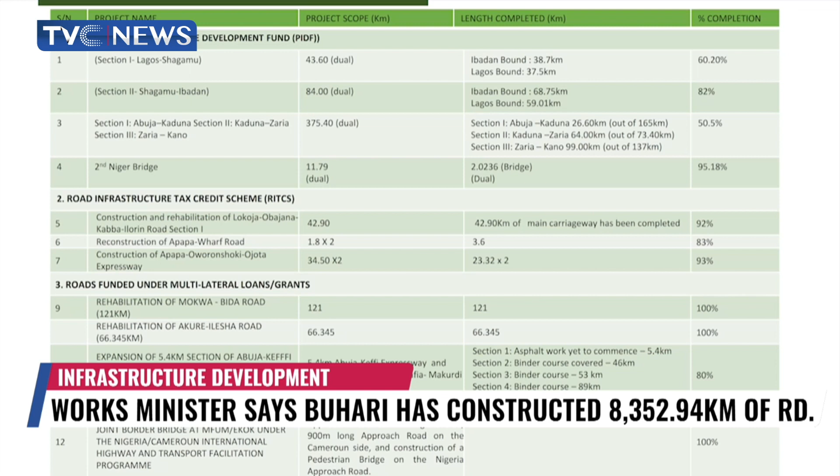And yes, everybody wants to see the final output, a finished road, a finished house, but we must understand that governments all over the world, without exception, commit to infrastructure for one major reason, in order to boost their economy. So beyond the roads, beyond the housing, there are a lot of human stories. And those were the things that I shared at the presentation. Those are the many unseen, perhaps unreported things that we have documented.

So when you're talking of infrastructure, it is for the purpose of boosting the economy, ease of doing business, travel time, quality of life. If a 3-hour journey becomes 30 minutes, you have extra hours of productive time that you can go and do other things. It becomes less stressful. It impacts cost of travel. It impacts cost of goods and services, and so on and so forth. So infrastructure is a means to an end, not an end in itself.

You were quoted as saying the administration has been able to construct and complete more than 8,352 kilometers of roads and created about 339,955 jobs between 2016 and 2022. Can you give us a kind of breakdown? Yes, I said so, and as I said, it is based on the report that we collated. So let me again explain, as I've sought to do on many occasions.

Nigeria has roads owned by different levels of government. So the total national network is over 200,000 kilometers. The federal government owns about 18% of that. That's about 30,000 plus kilometers. But they are the most used in terms of traffic volumes because they are roads that connect states, as against municipal roads that connect local governments and local government roads that connect wards. So we must understand it.

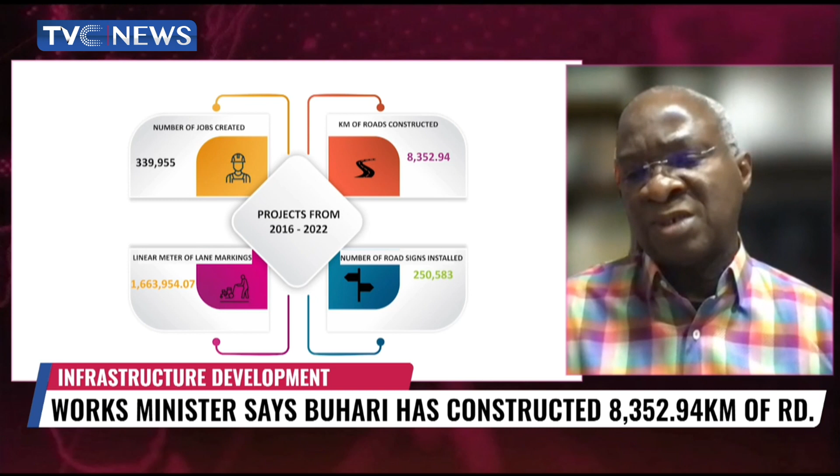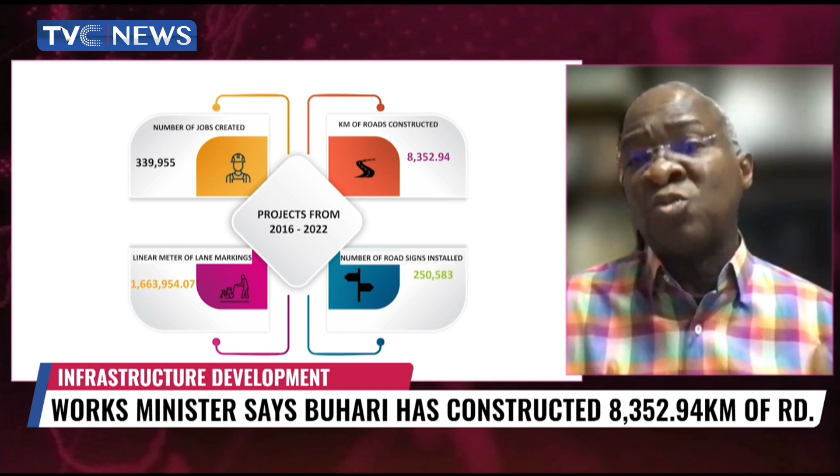So, for example, the Lagos-Ibadan Expressway that your colleague was talking about is 127 kilometers. So you don't rebuild 127 kilometers of an existing road by shutting it down. You can't. People's livelihoods depend on that road. So how do we construct? We close off a section of one side, perhaps 5, 10, 15 kilometers. We build that side, divert traffic to the other side. When we finish, we reopen it.

And that is the reason for some of the gridlocks that have been reported on your network and many other networks; it's the cost of construction. So on that side, for example, we finished 10 kilometers, it's completed. Of course, to some people, it may mean that they haven't finished the road, but we've constructed 10 kilometers, and we go on an accrual basis.

So I can give you some headline data. As of today, we have 1,642 contracts, and I stress the word contracts, but they represent 1,623 projects. So there are more contracts than projects. So a project is Lagos-Ibadan, but you have two contractors there. They have two different contracts.

Now, that road, as I speak to you, in the section between Shagamu and Lagos, is 44 kilometers. As of today, 37.75 kilometers has been totally asphalted. By asphalt, that's the black bitumen material that people are used to. But earthworks are going. So that 37 kilometers is what I'm reporting, for example, as constructed.

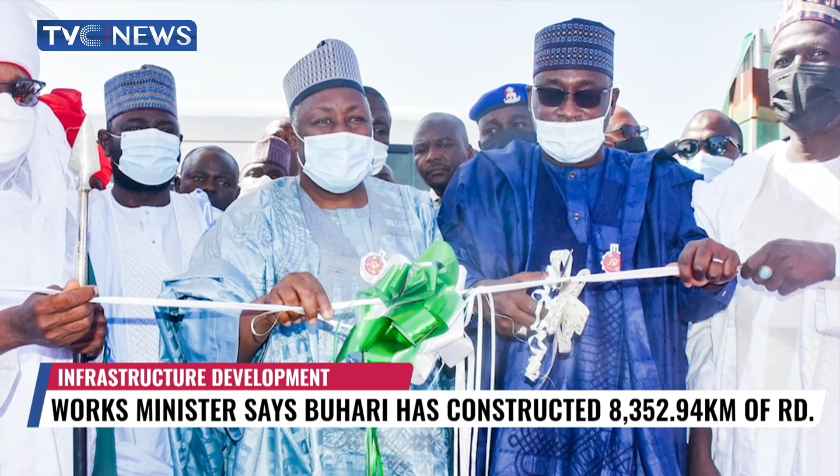So let us take, for example, Kano to Maiduguri, which is one of those roads. Kano to Maiduguri starts, as the name suggests, from Kano to Maiduguri. It's 560 kilometers of dual carriageway. So the section between Azare and Potiskum, that is between Bauchi and Yobe, has been finished, open to traffic, commissioned. Now, that's 106 kilometers. The section between Shuarin and Azare, that is between Jigawa and Bauchi, has been finished, open to traffic. That is 142 kilometers.

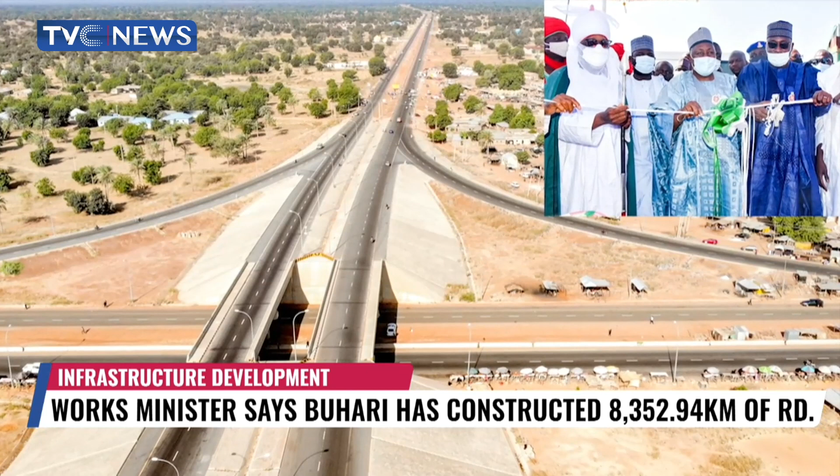The section between Damaturu and Maiduguri, that is Yobe to Maiduguri, the last section, has not been completed because at some time during the Northeast crisis, contractors left the site.

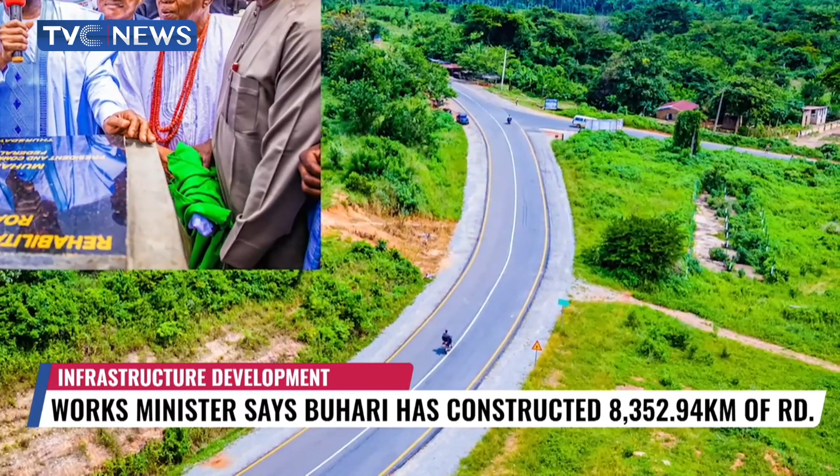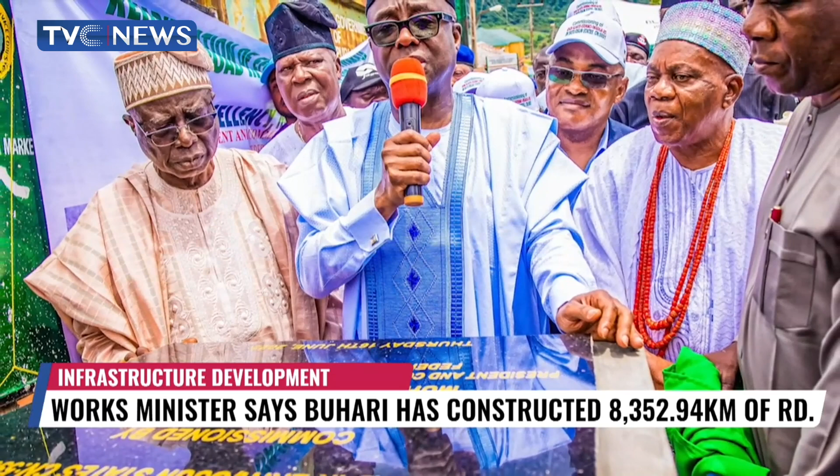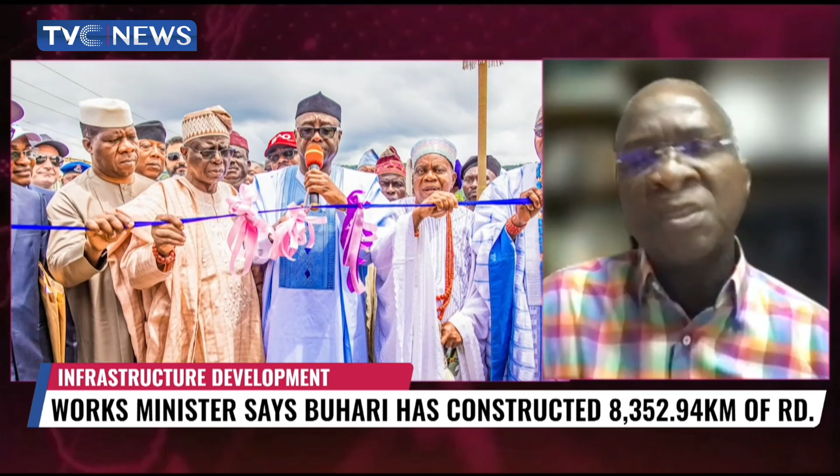So the other roads, Isoko Ring Road, Efon Alaaye, Erinmo Iwaraja Road, Sokoto, Tambuwal, Jega, that is the section between Kebbi and Niger States, 304 kilometers, Lafia to Tunga, Hadejia to Nguru, and that's the section between Kirikasama and Nguru, Nnenwe to Uduma, Vandeikya to Obudu. So those ones that have been completed and commissioned by the ministers representing those states on behalf of the president, 12 of them alone aggregate to 896 kilometers.

Okay. But as I said earlier, not only do we take data, we measure the impact. So we ask people using the road, we do surveys. So some of the feedback that came to us is that on the aggregate, these have impacted the economy, and I will share some of those figures with you. Travel time on those roads has reduced by an aggregate of 56.2%. Let me repeat that, 56.2% in reduction of travel time.

So let me give you an example. Lafia Tunga, 84 kilometers, used to take 2 hours; it is now 1 hour, 30 minutes. Obudu, Vandeikya is 24 kilometers. It used to take 60 minutes. It's now 25 minutes. And so on and so forth. Let me give you Sokoto Tambuwal, 304 kilometers. That journey used to take 9 hours. From those who use the road, it's now 4 hours, 30 minutes. And so on and so forth, in order not to take time.

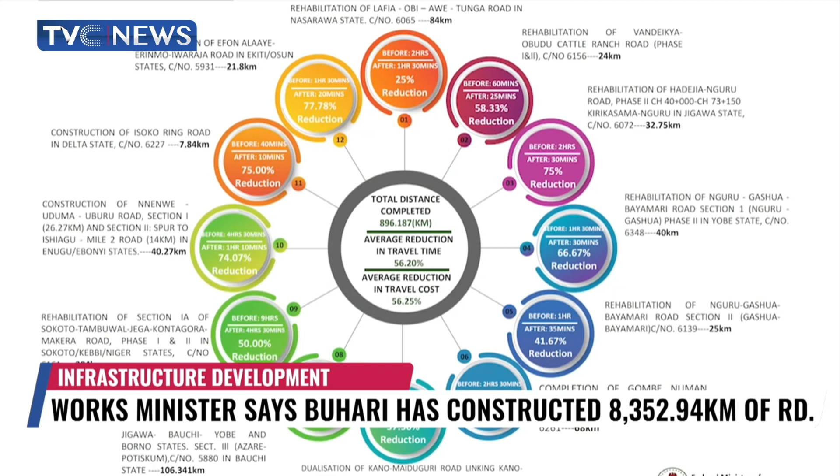But this is feedback coming from commuters, drivers, motor unions, who say this is what this road has done to them. Community leaders who spoke during the commissioning ceremony. And all of this data and video is available. But it also then impacts travel cost. But let me finish with travel time.

So every time that is saved, if time is money, those people have been enriched. Poverty has been addressed somewhat because they have disposable time with which to be more productive. The stress of driving and all of that, long hours spent away from families, all of that has been reduced, and those have values. Now, in terms of travel costs, it was 56.25 reduction. Again, this is data from the field in terms of travel costs. Before, of course, we had this global inflation crisis that has impacted cost of living generally.

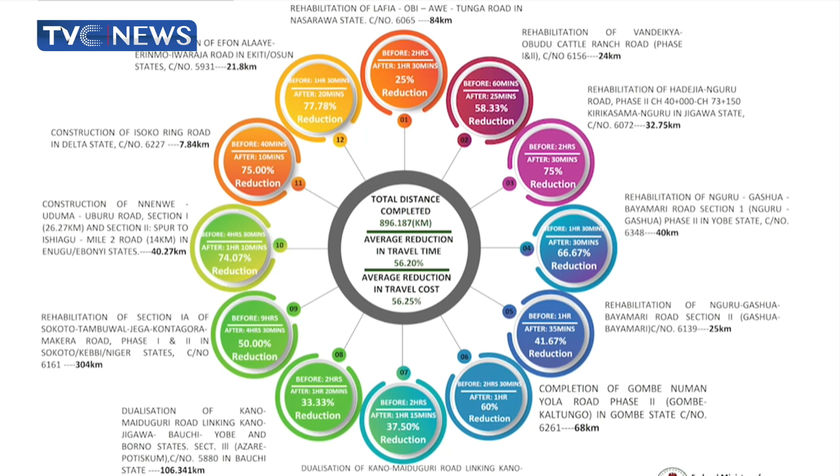So, Honorable Minister, I have a follow-up. Yeah, okay. Tell us how exactly your administration is able to find money in a season of paucity of funds to execute some of these gigantic projects. How exactly are you able to do it?

Okay, so the president must take a lot of credit for many of the things I report today, and I say this not in a patronizing way. So at the start of the administration, some of our colleagues in cabinet said, okay, look, go and do PPP, like you did in Lagos, and I explained to them that, look, PPPs take time to conclude, and they may happen, but you must also locate that within the setup of the economy and what the global migratory investment capital is indicating. But one day, I decided to do a presentation to council to show how long it takes to conclude a PPP using the Lekki-Epe Expressway case as a model.

That project started during Asiwaju's time. The concession agreement was signed in 2005. I was chief of staff then. We did not reach financial close until 2010. I'd become governor, and the president said, oh, we can't wait this long. And the first thing he did was he set up a fund called the Presidential Infrastructure Development Fund.

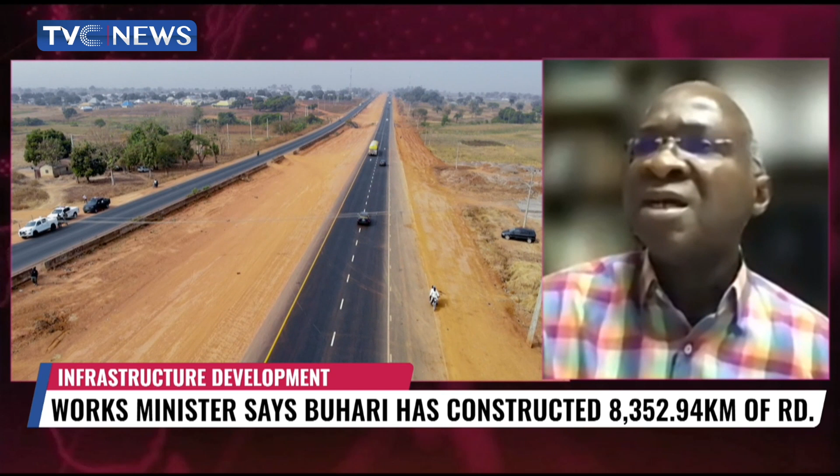And that's why you are seeing the progress I can report today. Later on, he went on a foreign trip, and one of his messages to our international partners was, look, there's a lot of Nigeria's money illegally taken out of the country. Can you refund some of them, especially during the military era?

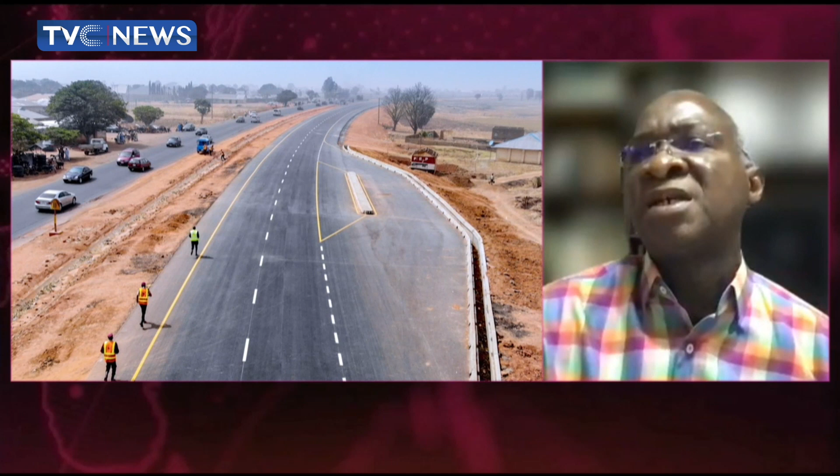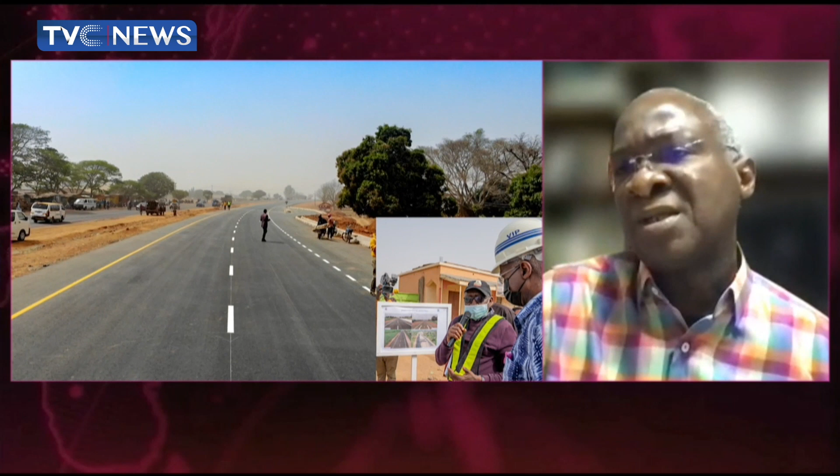So some of those monies started coming in, and he said, put it in the PIDF. That's the acronym for the Presidential Infrastructure Development Fund. So monies that were taken out, Buhari has brought them back in to invest in the development of this economy. And that's one of the reasons I say he deserves a lot of credit for what is happening. Now, that's one area of funding.

In 2019, he issued Executive Order number 7, I believe it is, in January of 2019. And that was the executive order setting out the terms and conditions upon which private investors, or companies, could invest money in building Nigeria's infrastructure. The first person who took benefit of that policy was the Dangote Group.

So in Lagos, where you are, you will see now that you have a better travel experience from Mile 2 right up to Oworonshoki. That road has been rebuilt for the first time since 1976 or so, when it was first constructed, entirely with concrete and reinforcement. Your travel time and your journey experience on that road now is a lot better. That's a product of the Infrastructure Tax Credit scheme.

So those people pay their taxes in advance before it is due, and then government gives them the opportunity to recoup it back. But of course, that policy requires that you cannot invest more than 50% of your tax liability for 1 year on a project. So only those who really generate large profits that turn to large taxes and the size of money required to construct a road can really participate.

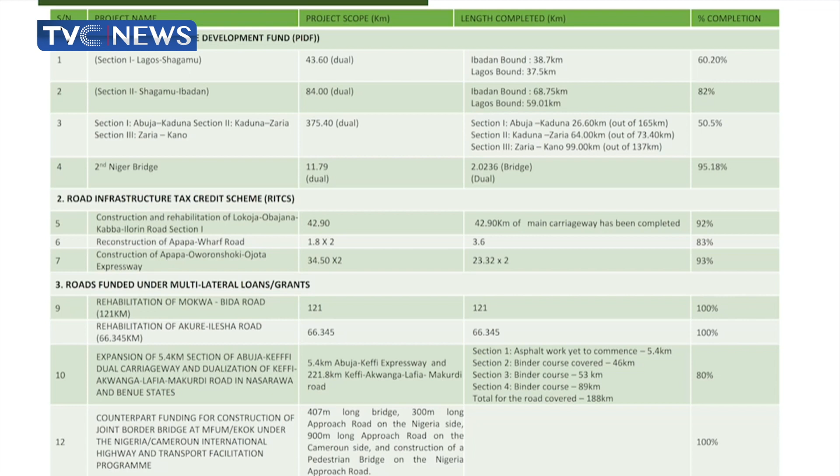This time we plan to use 2 contractors so that somebody can attack it from the Ekiti end and somebody will work from the Ondo end. So our team is working on that very rigorously. So I just want to appeal to commuters who use the road and the indigenes of Ekiti and Ondo to bear with us. We meant well. We wanted to give you a bigger and better road. These things take time, but we will get there.

Okay, let's talk about... No, hold on. You are talking about the J4. Okay. Honorable Minister, we wanted to call your attention to the Ijebu axis. When you are going to Benin on the Expressway, the Ijebu-Shagamu axis is almost impassable.

Yes, that's the contract with RCC. We have heard the reports, and hopefully before Christmas and into the new year, we will provide not just remediation, but also financing. Sometimes when it seems as if we're not doing anything, it's because the contractor has run out of funds. And let me use this opportunity again to explain this part.

Contractors don't keep construction materials, and this is why infrastructure becomes so pivotal to the economy. Every time we issue a contract, we're essentially distributing money through a value chain. The contractor orders all of the materials, from the aggregates to bitumen, to diesel, to lubricants, and so on and so forth, to use in building the road.

We have consumed 51 million liters of petrol. We have consumed 3 million tons of bitumen and 18 million tons of aggregates, 40 million tons of coarse aggregates. And this means that if you go to quarries that were not working before this administration, they're all busy. Labor, transport, and so on and so forth.

Reinforcement, 512,000 tons of reinforcement. Those are businesses for steel factories, distributors, suppliers. We have used 1 million tons of cement. So this is how infrastructure generally impacts our economy. Now, for a fuller measure of what I've just said, the bitumen, 24,000 tons of bitumen in 1 year. So let's go to one report.

We asked one of our biggest contractors to give us the report of the supplies he used in 2020, just one contractor in 1 year. Don't forget, I told you about 1,000 plus contracts. So this is one contractor. Maybe he has about 10, 15 contracts. In 2020, he contracted 1,421 suppliers. He paid out 45 billion naira in this economy to those suppliers. Those are small businesses. 45.

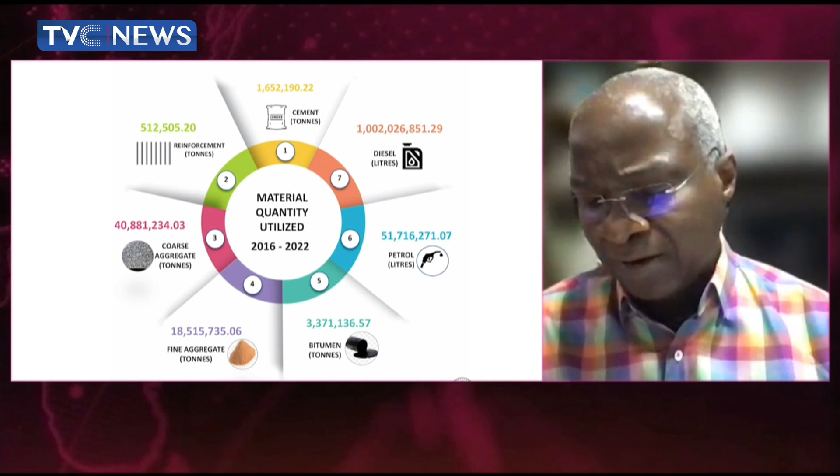Now, what did they supply? Bitumen, laterite, sand, cement, reinforcement, and diesel. So let's take an example. That year, he procured 24,000 tons of bitumen. That is 580 truck trips. Every truck is not self-driven, there's a driver. Laterite was 50,000 truck trips. Sand was 25,200 truck trips. Cement was 3,700 truck trips. And reinforcements was 950 truck trips. Diesel, 1,200 truck trips. Of course, these are only part of what is happening.

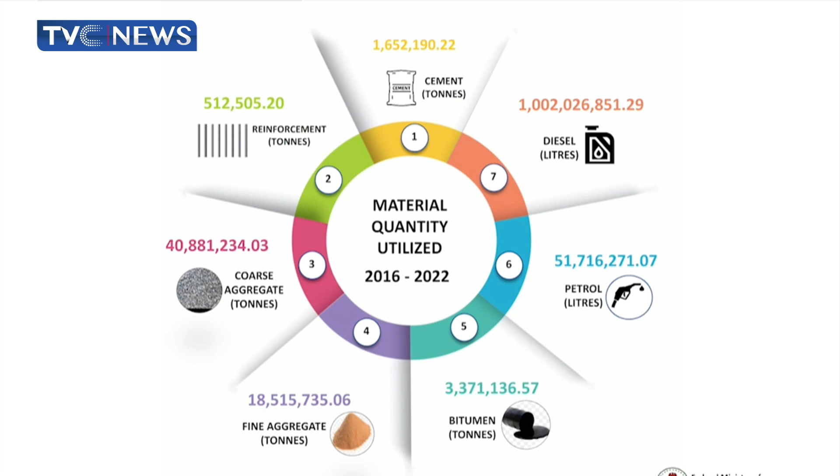There are those who are installing signages on those highways and those who are doing lane marking. Those businesses were not there, or they were in a state of dormancy before this administration came. Each signage installation that shows you the journey time, how many kilometers to the next state, each one employs 14 people from design to installation. And we have done thousands of them across Nigeria.

Each lane marking employs hundreds of people, and we're doing lane marking. These were businesses that were really either non-existent or largely dormant in this economy. So this is the way to really see the report I tried to present, the human side of it, families eking a living. Now, we haven't even begun to talk of those who supply food at each construction site.

Some of my interactions show that between the North and the South, as at last year, the average price of food, a meal for a worker on site, ranged between 250 to 300 naira per plate. And each of the vendors made a profit of about 5,000 naira every day, after cost.

And we have not even talked about the subcontractors. There was one subcontractor I met in Ibadan at our housing site. He had this cement mixer. Every day he went to site and they were using it. He got paid 20,000 naira every day.

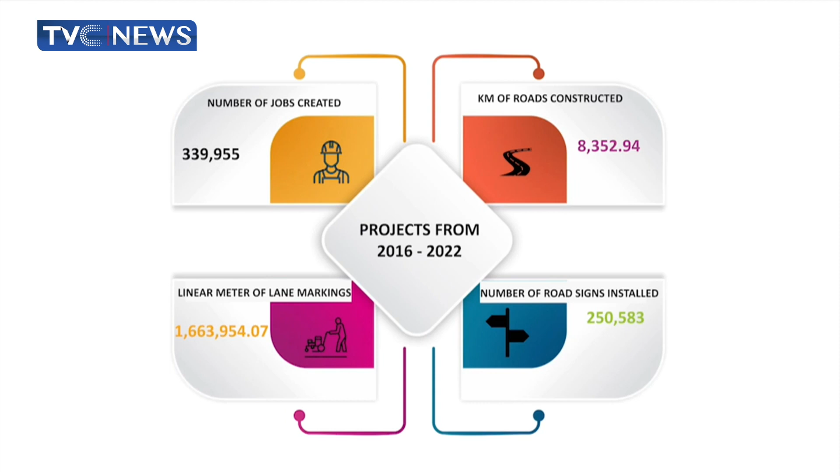But interestingly, his wife joined him at the site in Oyo. She was cooking. So she told me she was making profit of 5,000 a day. So one family was getting 25,000 naira every day. And just multiply the possibilities across 1,600 different contract sites. And that's just works alone.

When you add housing to it, it's another deal entirely. Then you add facility management. The president has signed Executive Order 11 for facility management and maintenance. So again, what is that doing? We are maintaining 28 federal secretariats.

We renovated, we now have maintenance contractors, maintaining air conditioning, cooling, heating, the gardens, the lawns, the plumbing, electricals. Each facility manager is now employing at least 40 people in each federal secretariat for maintenance. Those jobs were not there before. So this is how impactful infrastructure can be.

And how are you coping with the high prices? Right now, we know a bag of cement is now 4,000 naira. A bag of cement that used to be 1,000 plus, even ordinary block. Diesel. Good question.

Our contractors have been largely reasonable. I sense that from our interactions, they have accepted, as I've suggested to them, you have to take some reduced profit expectation because the alternative also is not pleasant, which is to shut down, lay off workers. So we have that cooperation. In many instances, we are revising the costs.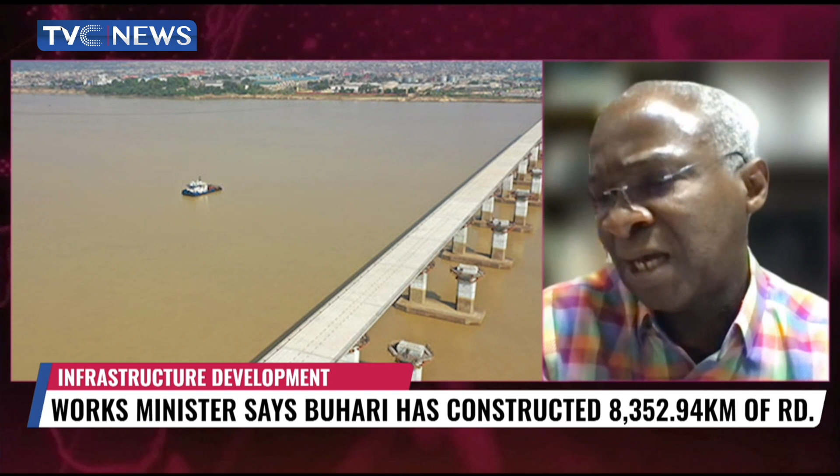But as of today, where we are is that the bridge as a component from Onitsha to Asaba is finished. So you can drive from the bridge end on Asaba to Onitsha and land. What remains is the approach road. Work is going on on the Onitsha side from the Owerri interchange to link the bridge away from the approach from the old Niger Bridge. Now we're trying to create the Asaba link, which is about a 4-kilometer road, just to link it on the Asaba side.

That's where our dredger is now. We can't work. We have to sand fill because all of that place is swamp. So we are still keeping our fingers crossed. We were hoping that it would all have been done. Nobody foresaw these floods and some of the other local issues. Compensation had to be paid. Villagers had to be appeased. A lot of consultation. All of that work is not seen, but it has to happen before you can take over a construction site.

And don't forget also, I think in the months of June or July, we had to shut down power supply between Onitsha and Asaba. We had to move all of the transmission lines, what you call the high tension lines, across the entire project length. All of that had to be relocated.

So people just want to see the road finished, but there's a process to it. And we have to go through this process before we can say that we have safely done a road. So we're fingers crossed, hopefully before the end of the year, if not early in the new year, but certainly that project will be completed and handed over before the end of our term.

Yeah. Honorable Minister, when I visited the second Niger bridge, I saw infrastructure in place that clearly suggests that the road will be tolled. I also saw infrastructure that suggests that vehicles will be weighed before they use that road. I mean, trucks. There is a weighing facility being built. I saw something like that in respect of the Lagos-Ibadan Expressway.

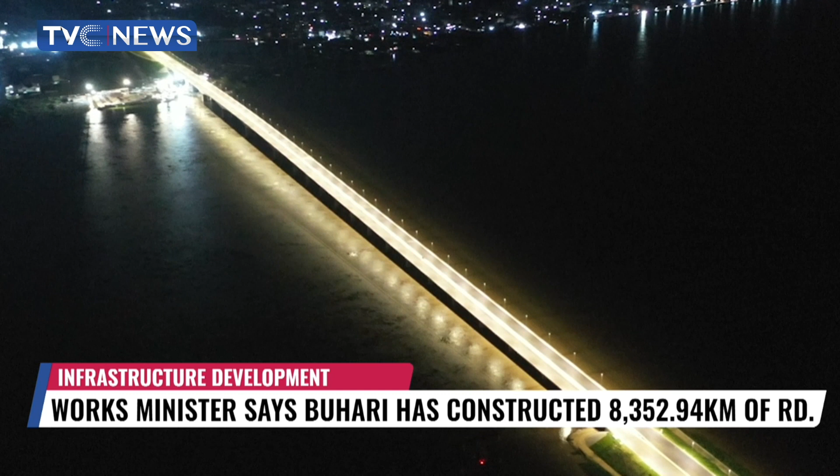Okay, so your question helps me demonstrate the point I was making about the difficulty of reconstructing a road that is in use and building a completely new virgin alignment. So what you saw on Second Niger Bridge, that's a brand new road. Nobody is using it. So we have the luxury to build at our own pace, if you like that word. So on Lagos-Ibadan, there are toll plazas also in the design.

Okay? Yes. But what is driving us first is the complaint and the inconvenience to commuters. What they want first is the road. We must do the road first. The toll plazas will come as furniture, if you like, to the road.

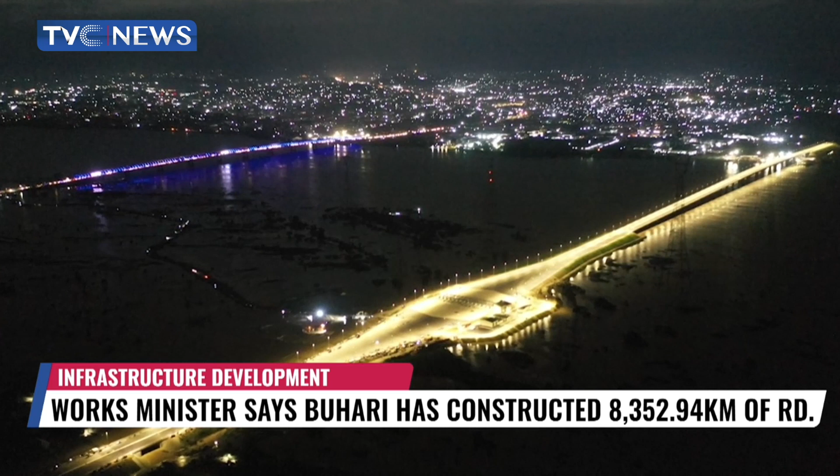So it's like building a house. The first thing is you want to be sure that when there is rain, when there is sunlight, when there is heat, your house is safe and sound. All the fittings and trimmings, the furniture that comes in can come later. What you want first is shelter and protection, doors and windows, all the other fittings. So that's my analogical answer to the question.

How about the issue of dead weight sitting on roads that are not constructed to accommodate such dead weight as tankers and the rest of them, and thereby even shortening the lifespan of our roads? Is there any measure being put in place to ensure that what we continually see, especially in Lagos, whereby truckers park on our roads and ultimately do tremendous damage to those roads, does not happen to some of these new roads that this administration is delivering?

Okay, so it's a very important question you raised. It relates to axle load specification. There is an ECOWAS regulatory standard which we are signatories to. President Buhari has been helpful in ensuring compliance by the major weight points, which is petroleum products at the depots and from the ports at our seaports.